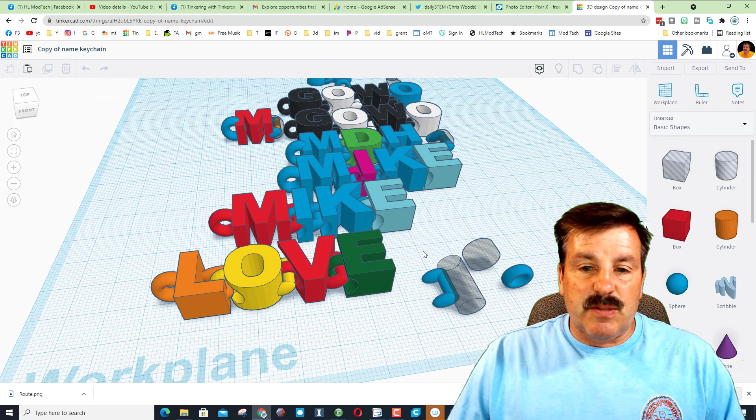First things first, if you're making a second keychain, I recommend that you duplicate. That way you don't ever wreck the first keychain, you have all your parts available, and so on. So in this project, I already had Mike, and I made a new one called Love.

I am going to delete all of this at this point. I've got other copies of it, and I've got my spare parts here just in case I need them. Now I can keep making new words and reuse the letters later. My goal eventually would be to have all the letters built so I can just assemble the keychains and put them together. So here's how I did the word love and a couple updates I found out.

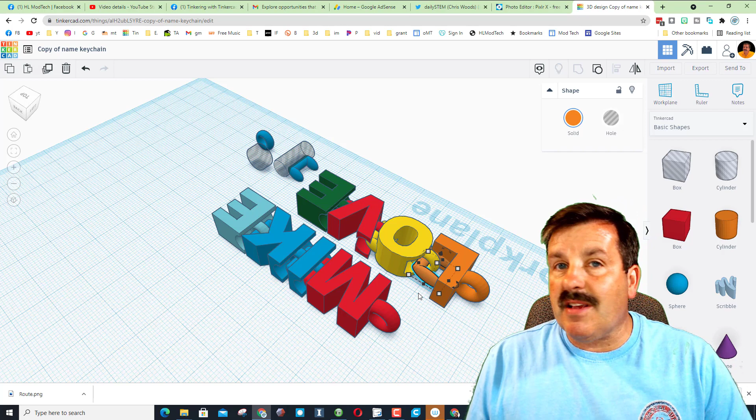First, if you click on my L, you'll notice it's not grouped. That's because I had to adjust it, since the L did not have a spot for this whole piece to connect. This is one of the cool things about this lesson - you'll have to problem solve for the different shapes of the letters.

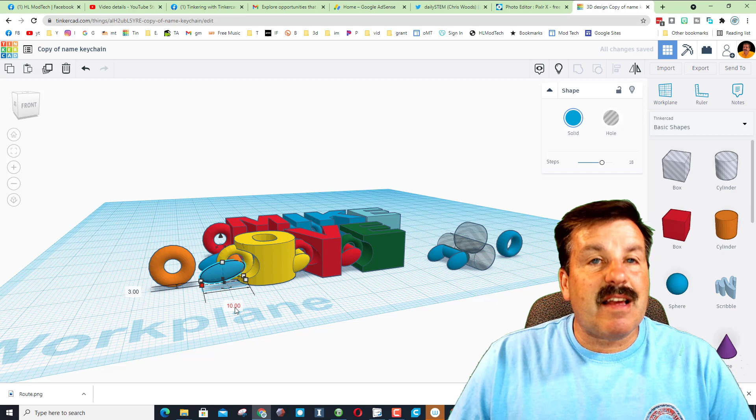You can see the V was fancy as well. All I did was take this part right here - I'm going to hide the L for a second so you can see this - and I just made the egg piece longer. I ungrouped it. Remember, back in the day it was 7, I stretched it to 10, I kept the angle. I'm going to hide these pieces real quickly, and I regrouped this.

Now because I think I might have other letters like this, I can store it over here. I'll have my short one and I'll have my long one.

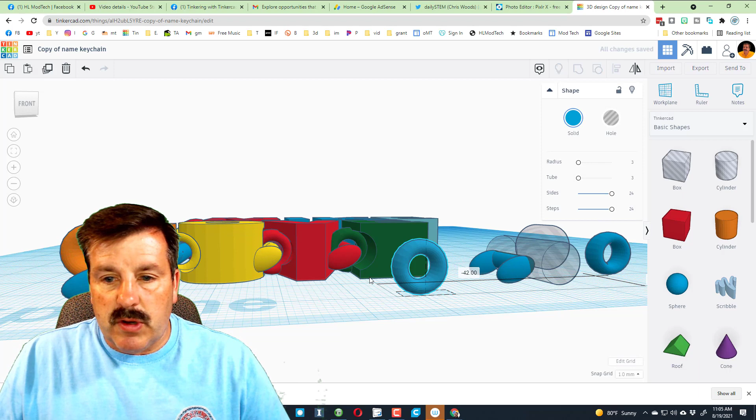Real quickly, let's bring back our show all. Another adjustment I made was that these parts weren't always touching when I made this part. Let me show you what I mean. If I do Control D and bring this guy in, you see how he's just the tiniest bit under?

Well, I switched to that 0.1 grid, held down Shift, and just stretched it up that tiny bit till it touched. I wasn't making a large adjustment, but it's nice that it had contact all the way across. I'm still keeping my default size, but I can tweak it if I need.

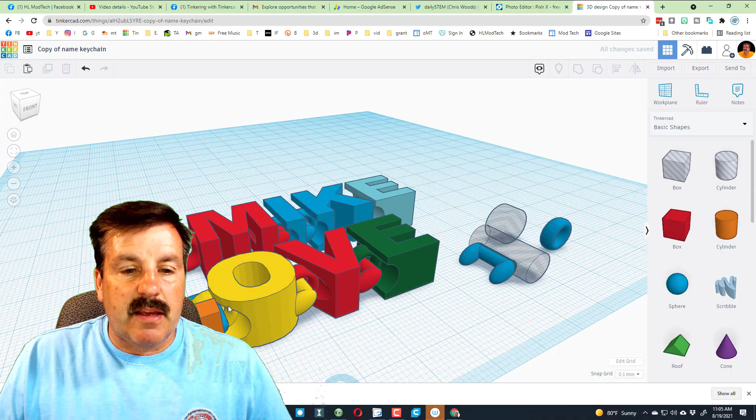Alright friends, so these are just simple tips, but I think this is going to be a total blast and a hit in my classroom.